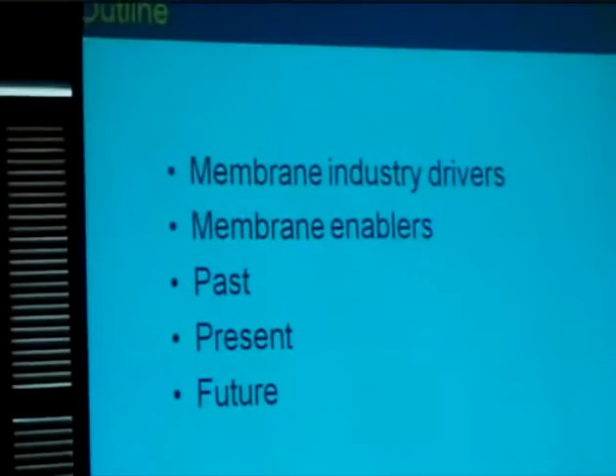Well, I'm going to briefly go over the drivers for this industry. Sven has actually talked a little bit about some of the things I'm going to talk about. Then I'm going to mention some of the enablers that have allowed membrane technology to play the role it has. Then talk about its past, present, and future, each of those areas very briefly.

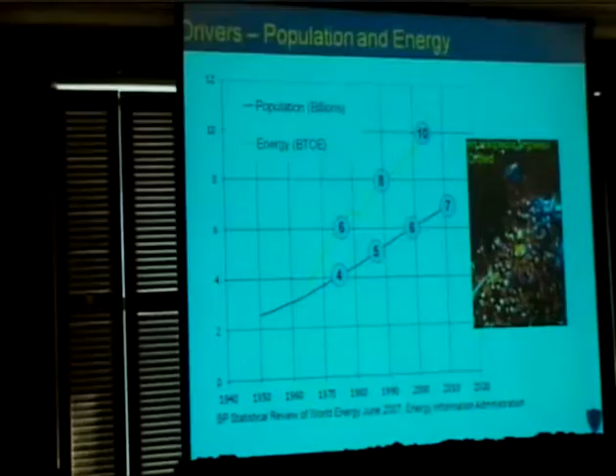The primary driver for interest in membrane technology is the growth in the world's population. If you look on this chart, you can see that by the year 2010 we're anticipating about 7 billion people on the surface of this Earth. Along with that comes a certain demand for energy, shown by this green line. We're using about 10 billion tons of oil equivalent per year, and if you extrapolate that line out to 2010, you can see we're going to have tremendous growth in energy consumption as well.

So what this says is that we can anticipate population and energy use are going to grow. Energy use is going to grow because we have more people, but also because the world's population is becoming more affluent. As they become more affluent, they tend to use more energy. There's a trend or correlation between growth in the gross domestic product and energy consumption.

I think that's an interesting question: can we decouple the growth of those two things? Can we have GDP grow without energy growth? It is possible, but if we just extrapolate the data we have, we see about 3% energy growth per year, which over a couple decades means we're going to increase energy consumption by 70%. I think that's not sustainable, and I think all of us would agree that's not sustainable given our current energy crisis.

But there is hope. At least in the US, there's been a study done by ORNL which identified 200 trillion BTUs per year of energy savings that are possible just by looking at separation processes used industrially and trying to modify those processes appropriately to reduce energy consumption.

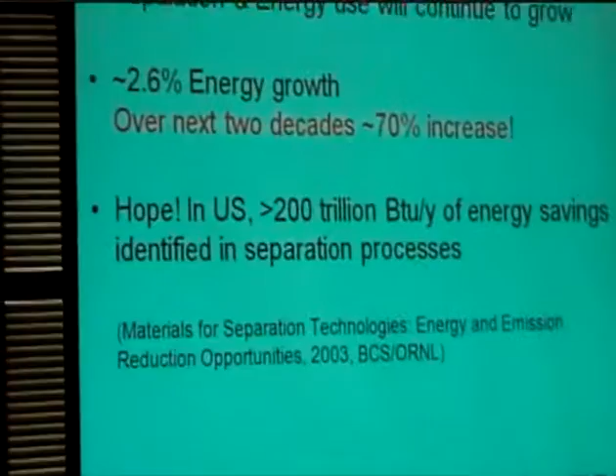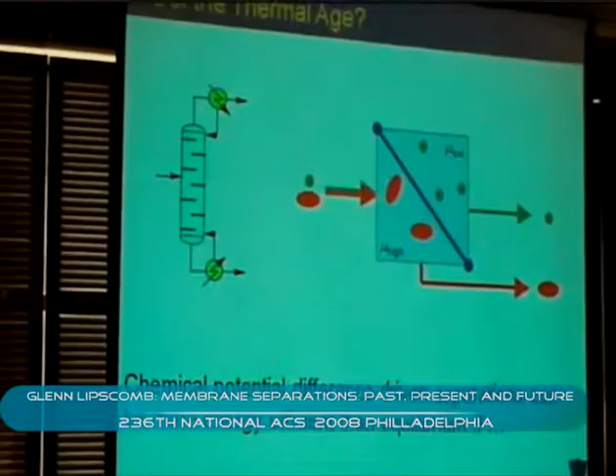Now how can we do this? Well, we might start thinking about the end of the thermal age. Most industrial separations are done using thermal or equilibrium processes, such as distillation. However, if we can switch to separation processes that make use of chemical potential differences, maintaining two streams inside a device at different chemical potentials, this can be a lot more energy efficient than an equilibrium separation process—this rate-based process.

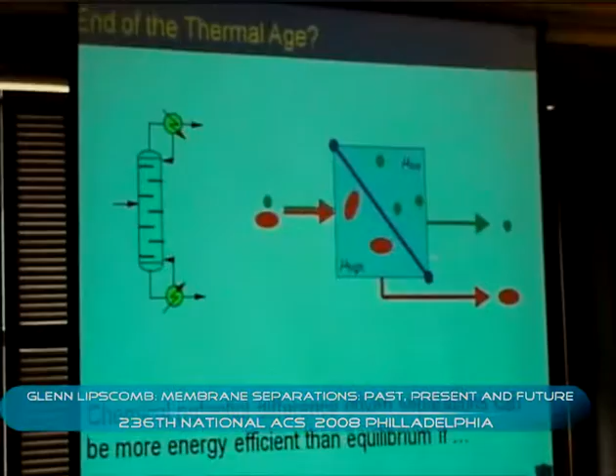Now, for this rate-based process to work, at least for a membrane process to work, we have to have a material that allows selective transport through it. We have this gradient in chemical potential across a material, say a membrane here. It's going to drive transport of the red and the green species across it, but all we want to allow is one of them to go across, say the green. So somehow we've got to come up with a material that will allow that selective transport.

And there are several ways of doing that. One, for instance, we can make a porous material, like this blue block here, that will allow different shaped objects to go through.

It will prevent this big blue circle from going through, but it will allow this red cylinder to go through if it's aligned in a proper configuration. So we can have size selective separations.

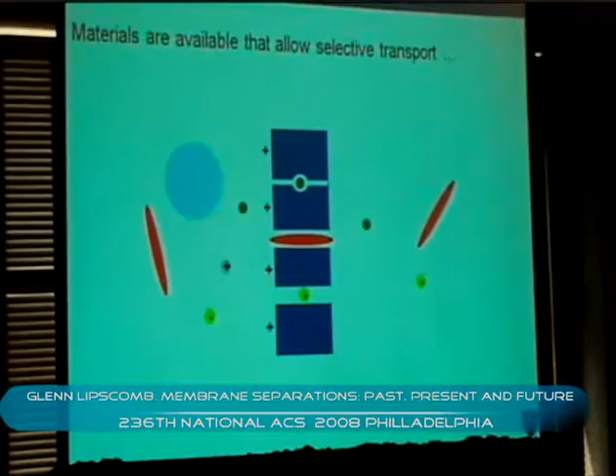We can also have separations based upon charge. If we charge the surface of this membrane in a positive way, then positively charged molecules will tend to be repelled by it, and negatively charged molecules will be able to pass through it more freely.

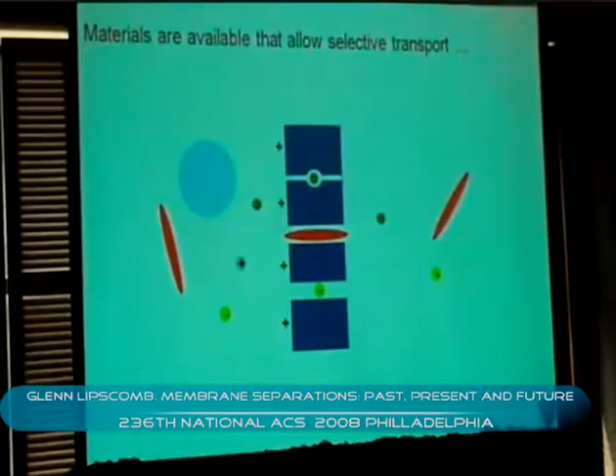We can also make use of differences in solubility. For instance, this little green circle right here, if it dissolves to a great extent inside this material and then diffuses through it, we can selectively remove it from something else that doesn't dissolve into that material or has a slower diffusion rate. So the key to membrane processes is identifying this material right here and making use of these different separation mechanisms. Now, there's been tremendous success.

So there's one story I think we need to tell as membranologists, everybody, to highlight the importance of this technology in the future. And I think that we're going to see this played over and over again in different areas.

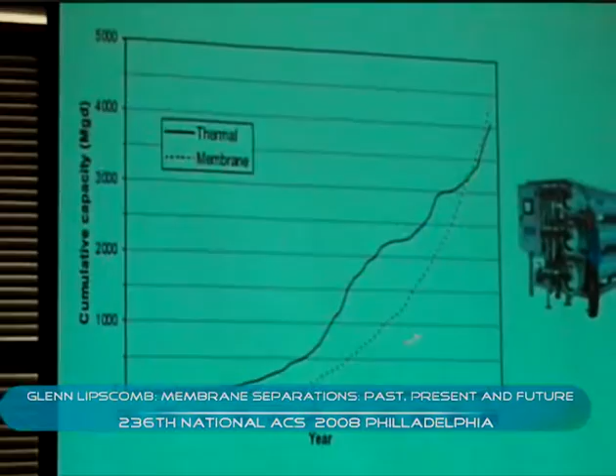Two interesting things to note: membrane processes don't exist until about 1970, it's all thermal until then. The second thing is that now membrane processes exceed thermal processes in capacity. And in fact, virtually every new desalination project is membrane-based. There aren't any new thermal projects.

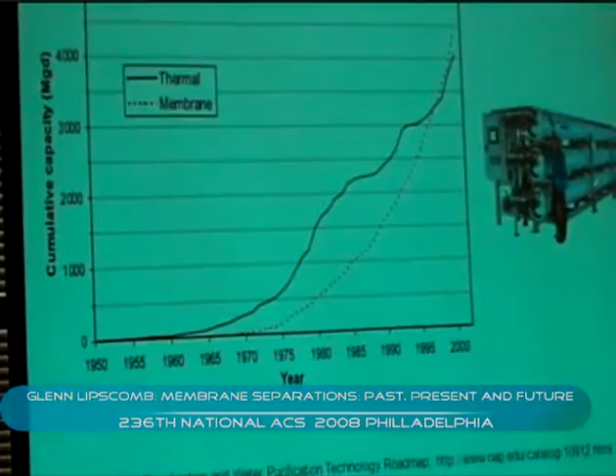What's shown over here is one of the largest desalination or membrane modules that you can buy. This comes from Koch. You can see the size of those things.

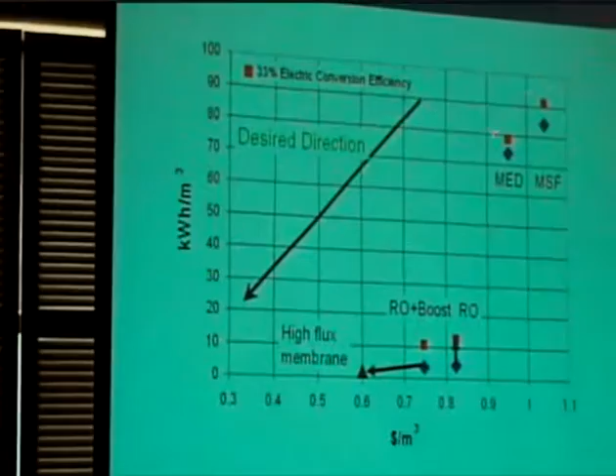Well, why have membrane processes displaced thermal? This is a plot of the energy required in kilowatt hours per cubic meter to produce a cubic meter of fresh water as a function of the cost of that cubic meter of fresh water for different processes. These four points up here in the corner are the values associated with thermal processes. The MED is multi-effect distillation, and the MSF is multi-stage flash.

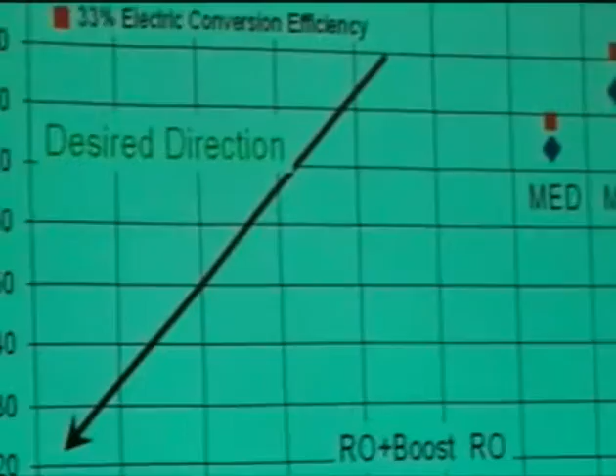The two different symbols, blue and red, correspond to whether we take into account the efficiency of converting a hydrocarbon into electricity. The red takes the efficiency into account. In fact, you're only 33% efficient in converting a hydrocarbon into electricity. Well, here's the values for the thermal processes.

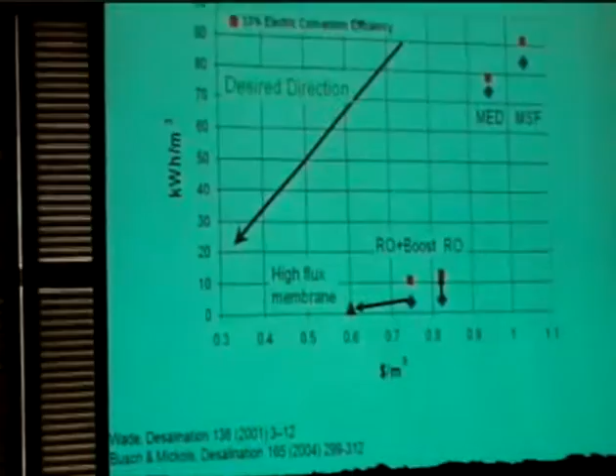What we really want to be is down here in this corner. We'd like to produce fresh water and have it use no energy and cost nothing. So we want to move from here down to here, and membrane processes allow us to do that.

Here's RO processes, I would say an industry standard a few years ago, an RO process in which we make use of energy recovery. You can see we have a tremendous drop in the energy consumption, a factor of 10 drop.

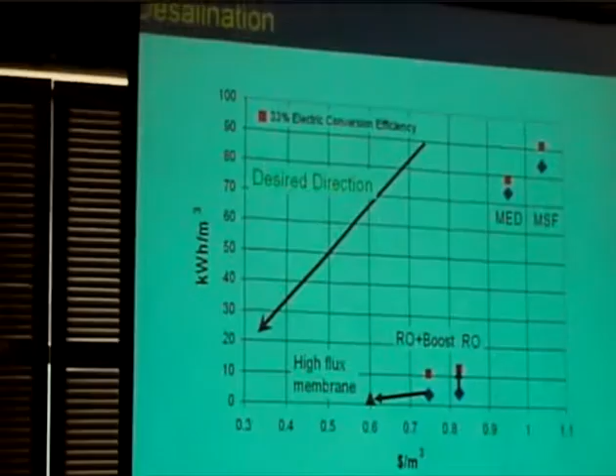That's huge. Secondly, we've reduced the cost by a factor of almost 2, especially if we take into account some of these new high-performance materials. Membranes have reduced the energy consumption by almost an order of magnitude and the cost by a factor of 2. I like that, and I think everybody should hear that, because this says that this is a technology we should be considering in a lot of other areas.

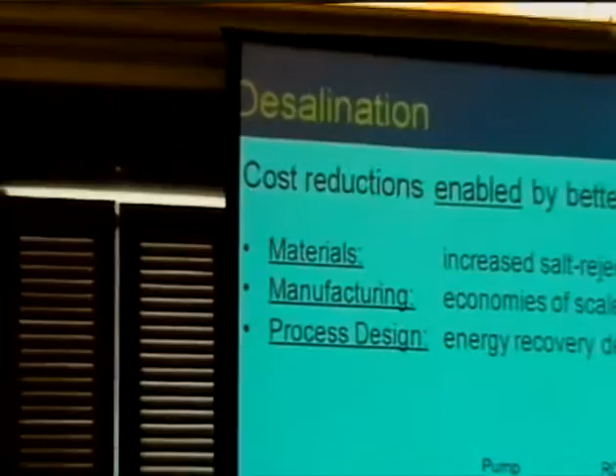Well, what has enabled that? First of all, we have to have material - a good material. There have been advances in making materials that have high salt rejection, more importantly, high flux and longevity. These materials have to last a certain period of time - 10 years, maybe more, 15 years.

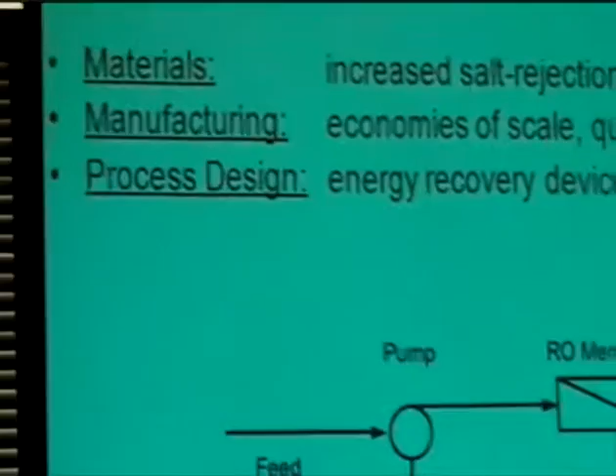There's also been changes in manufacturing, some economies of scale in the manufacturing of these units. And I think equally important, quality control. In fact, now we can make materials that are uniformly the same quality, with uniformly the same permeability and the same selectivity.

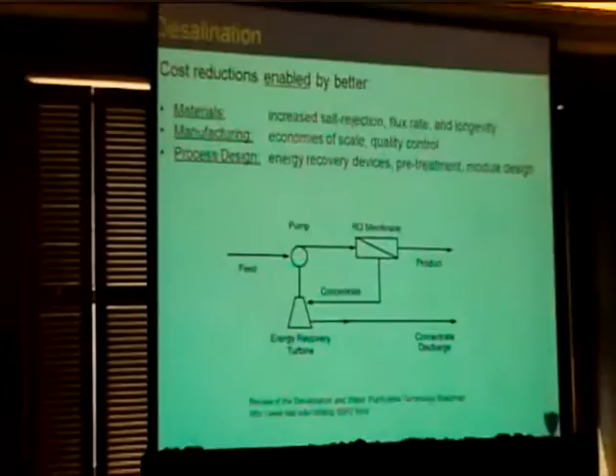And finally, there's been important advances in process design, energy recovery devices, and the fact that we need to pre-treat seawater before we run it through a desalination unit. If we don't pre-treat it, then that unit will only last too short a lifetime for it to be economically viable.

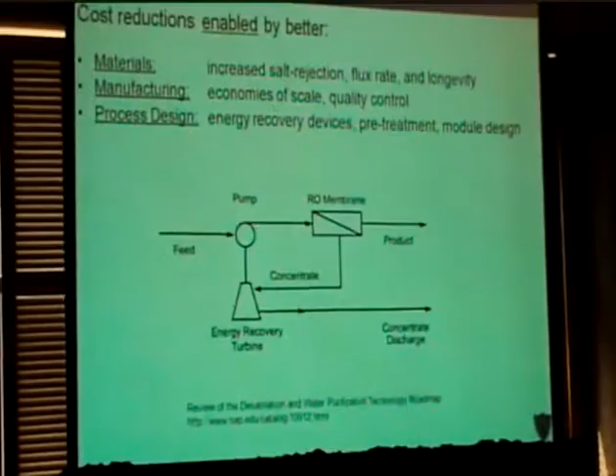Finally, module design: the fact that we're able to make large-scale devices that work efficiently. What's shown here is a picture illustrating this energy recovery turbine. We take seawater, pump it through an RO unit—what's missing here is all the pre-treatment equipment that should go right here. After it goes through this, fresh water permeates across the membrane and is collected as our product.

What's rejected is under pressure—it's a high-pressure concentrated salt brine. We can make use of that, recovering that energy by running it through this recovery turbine. All modern plants have that turbine to help or assist the pump in bringing the fresh seawater up to the appropriate pressure, 300, 400 psi or higher.

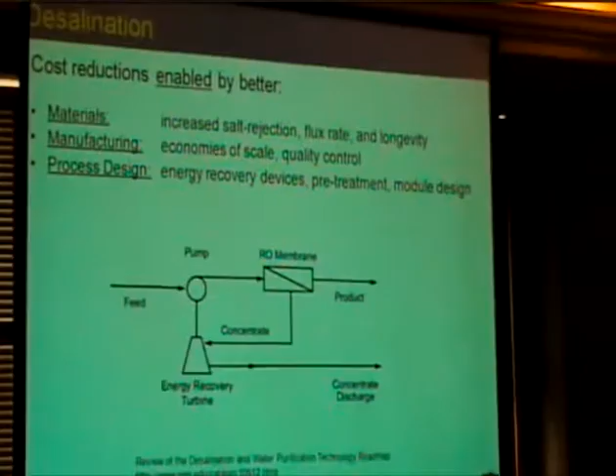Okay, that motivates why we're interested in membranes. Trying to provide some motivation for that, and what the key enablers are: materials, manufacturing, and process design.

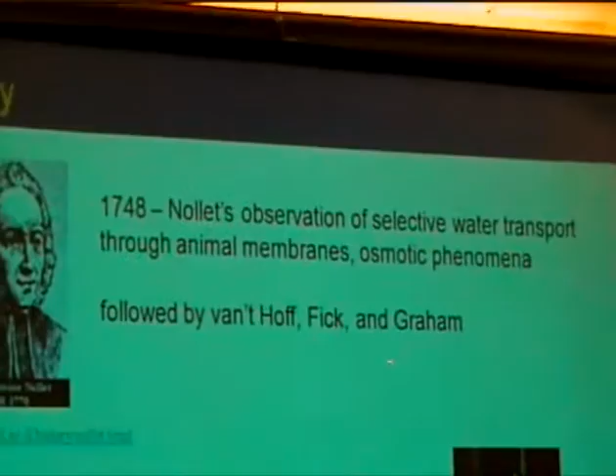Now I must go into what was in the article written for the special issue of the symposium, the ACS Symposium series, and talk a little about the history of membranes. Most people would trace the history of membranes to Nollet's observation that an animal membrane selectively allows water across it, but not alcohol. Van't Hoff figured out how to quantify that mathematically, and Fick and Graham followed up with studies of diffusion that allow us to characterize diffusion through these materials.

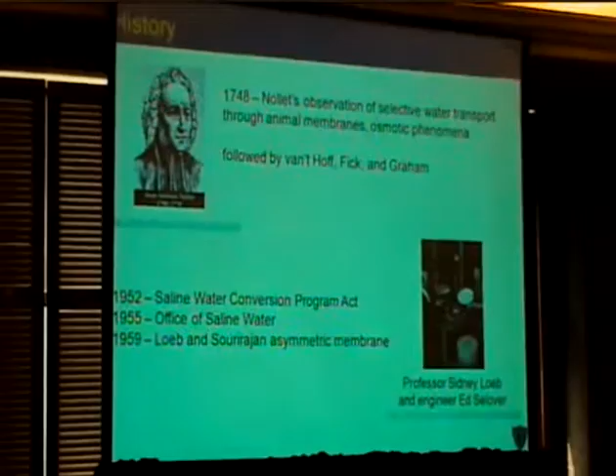But those were scientific discoveries, not made use of commercially until much later. I'd argue the commercialization of membrane technology started with the Saline Water Conversion Program Act in the US back in '52. Initially they weren't interested in membranes—they just wanted to produce drinking water for people in this country. They made some progress, and eventually that morphed into the Office of Saline Water, where there was increasing interest in membranes.

Ultimately, a few years later, it led to the key invention, the key discovery of the asymmetric membrane by Loeb and Sourirajan. They were nominated, I believe, for a Nobel Prize on this, and I think this is one of the key discoveries that have enabled membrane technology. Here's Sid Loeb, from a web page on UCLA's website, showing him and one of the engineers making some of the early RO membranes, Ed Selover.

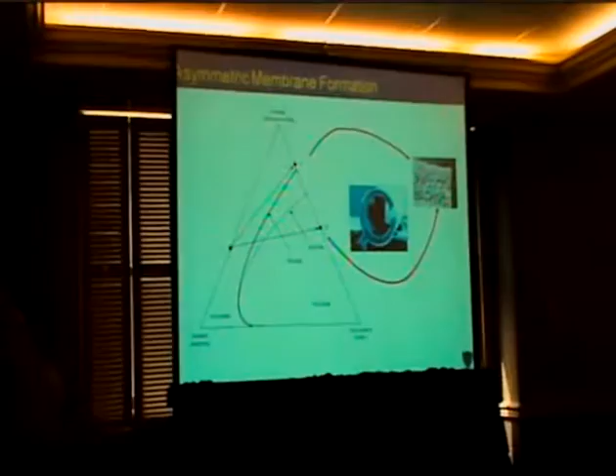What they found is that instead of just taking a piece of plastic—cellulose acetate, which is what they were using for desalination—and pushing water through it, they took that plastic and mixed it with a solvent, acetone, to make a solution denoted by point I. They selectively removed that solvent and replaced it with water, such that when they cast a film, the top ended up at composition point II, and the bottom ended up at composition point III.

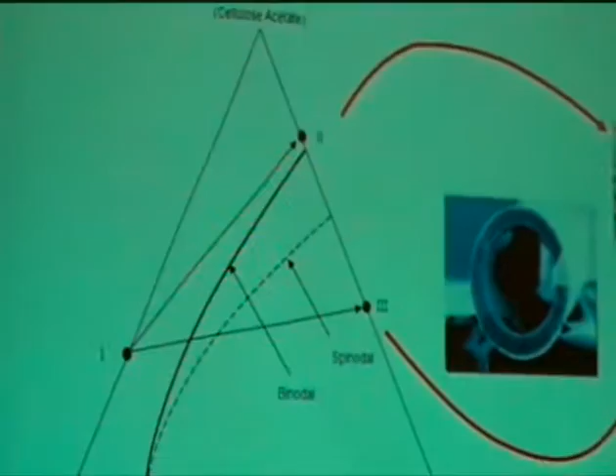We can envision this being a film or a hollow fiber—those are the two main forms membranes come in. Imagine we cast a film, selectively removing the solvent, acetone, and replacing it with water, such that at the top of the film we end up with this composition of cellulose acetate and water, and at the bottom we end up with a different composition. Now those two compositions differ in a very important way.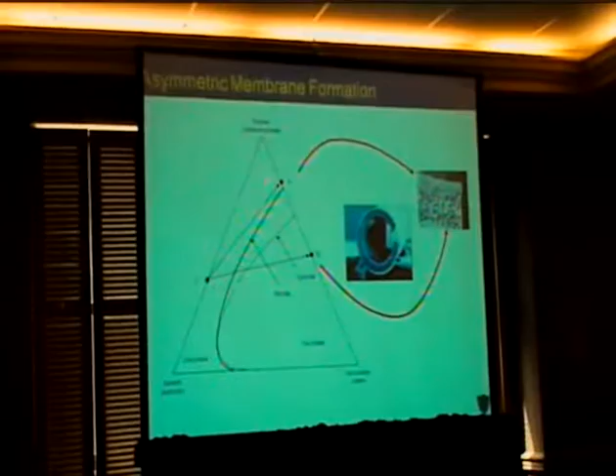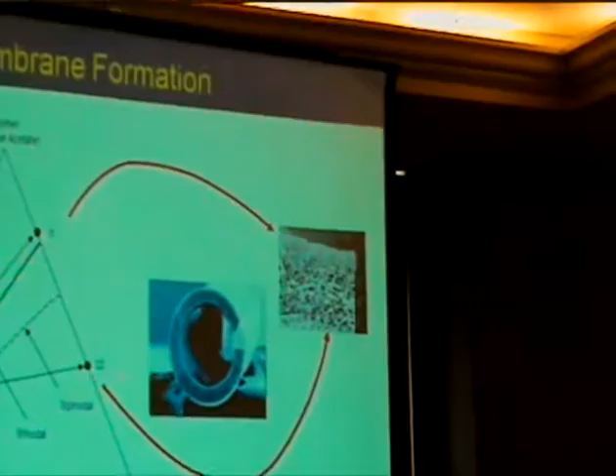One lies outside the phase envelope, outside the binodal, so we have a one-phase solution at 0.2; 0.3 is inside it, so that's two-phase. Now let's remove the water. If we remove it slowly enough from the one-phase mixture at 0.2, we produce a dense polymer film, as shown at the top of this SEM image. If we remove the water from the phase-separated mixture—imagine droplets of water inside a polymer-rich region—removing those droplets leaves behind this porous structure underneath, corresponding to 0.3.

What we've done then is create a film or fiber wall that has a certain macroscopic thickness, but the effective dense thickness, where the discrimination occurs between salt and water, can be much thinner, confined to a sub-micron region, whereas the support structure underneath can be several microns thick. If you design the pore structure correctly, it poses very low resistance to permeation and no selectivity. This is the key innovation right here.

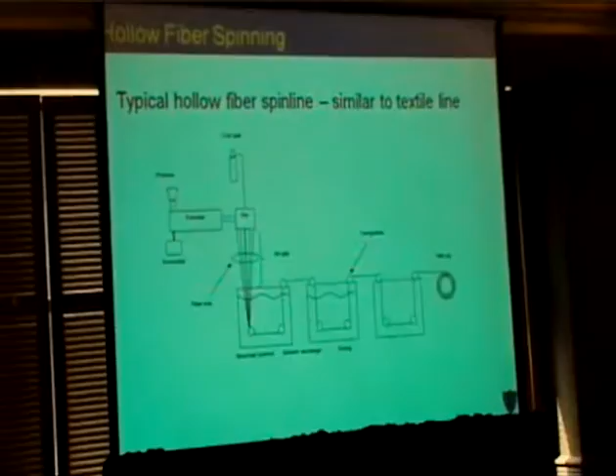Now they make use of this innovation, starting with hollow fibers primarily for desalination and also films. They take the polymer and solvent, mix it in an extruder, and run it through a die to form a group of hollow filaments, a fiber tow, just like you would in a textile line making solid textile fibers.

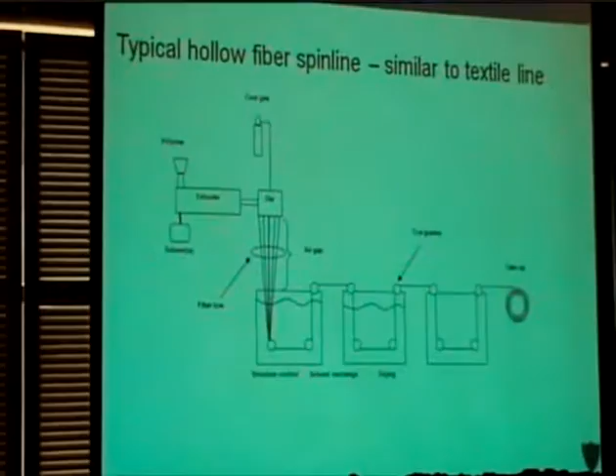This tow then would pass through a couple of baths. The first bath might set the structure, causing the solvent exchange that leads to an asymmetric structure of a thin dense film on top of a very porous support. Subsequent baths set that structure and dry it, and finally the fiber is taken up on a spool, just like you would take thread up on a spool for sewing.

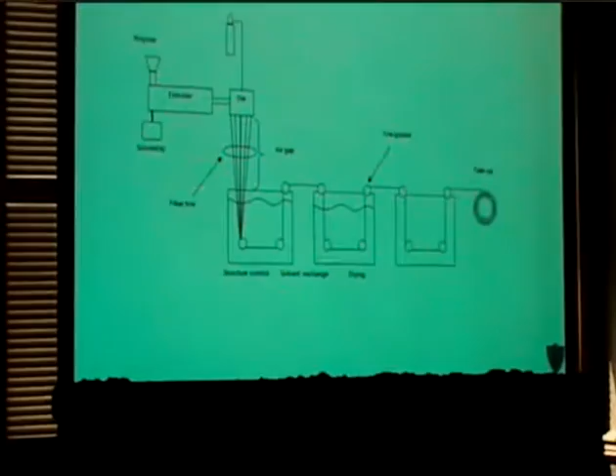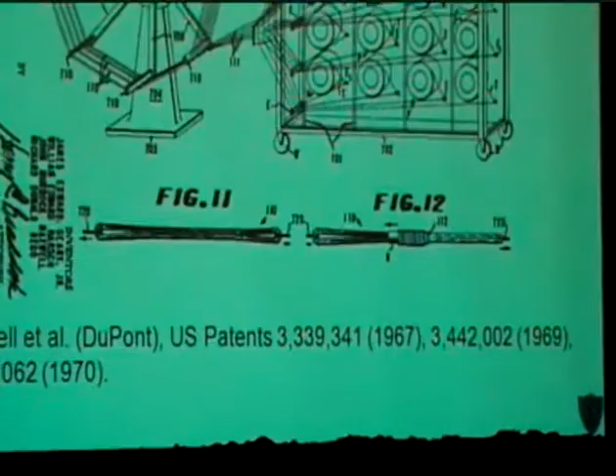So this is how the fibers could be made. I'm going to show you how you make modules out of that, because although a lot of work has been done identifying the right materials for different separations and ways to make those materials into films and sheets, I think one of the key enablers is how you make the modules out of that. I'm going to talk about some patents which I think should be required reading for anybody interested in membranes.

This work was directed toward gas separation. Although it was directed toward gas separation, a lot of these design and processing steps were motivated by work they did for desalination initially under the Office of Saline Water. So I highly recommend you read these patents.

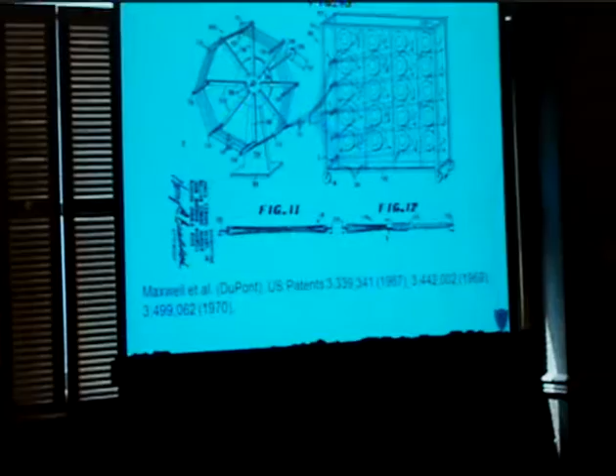Once you take this fiber up on a spool, what they describe is how you make it into useful devices. You take these spools, put them in an array, pull the fiber off those spools, and wrap them around this device. You can see there are multiple filaments—4 filaments being wrapped continuously around there.

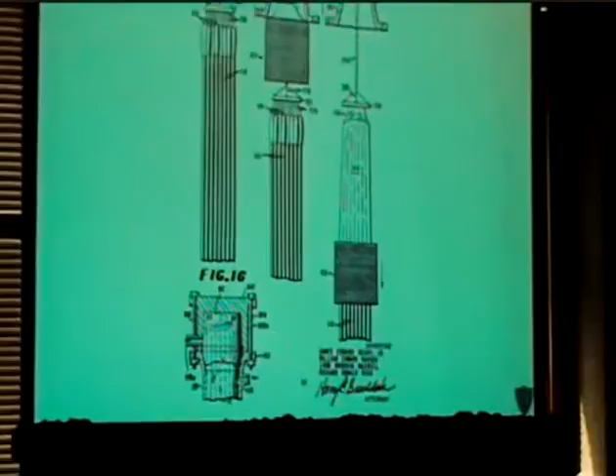What Maxwell and his coworkers at DuPont taught us is that you take one of these spools of continuous filaments that's been wrapped, stretch it out, and pull a sock over it. This little thing is an elastic sock. The reason you put that sock over there is to hold the fibers in a roughly uniform configuration relative to each other. A bunch of these sock-wrapped tows then get hung together from a plate like this.

This now forms our macroscopic module. To hold these individually wrapped fiber tows together, another sock gets wrapped around it. Once again, the purpose is to hold them so they're uniformly spaced relative to each other—you don't end up with big gaps between them.

Once you form this sock-wrapped module, a case gets put over the end of it—here's the sock-wrapped portion, and here's the case that goes over the top. What they suggest you do then is take this module and put it into this device right here.

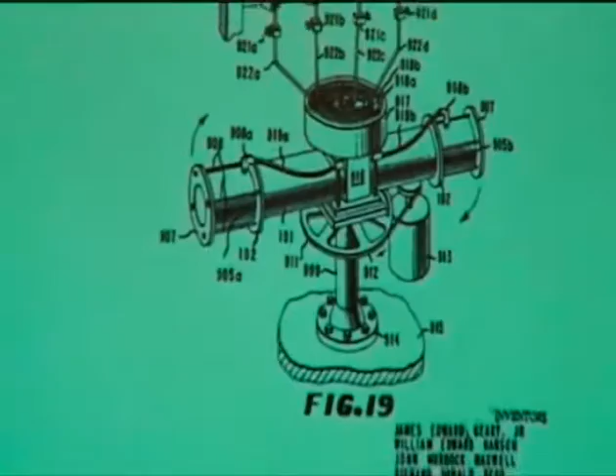What this device does is rotate. As it's rotating, an epoxy is fed from these pumps and reservoirs up here into this cap, which is a mold. The epoxy flows into that mold and hardens. As it does, the centrifugal forces keep the epoxy from wicking up into the fiber bundle, forming a nice edge to the tube sheet being formed.

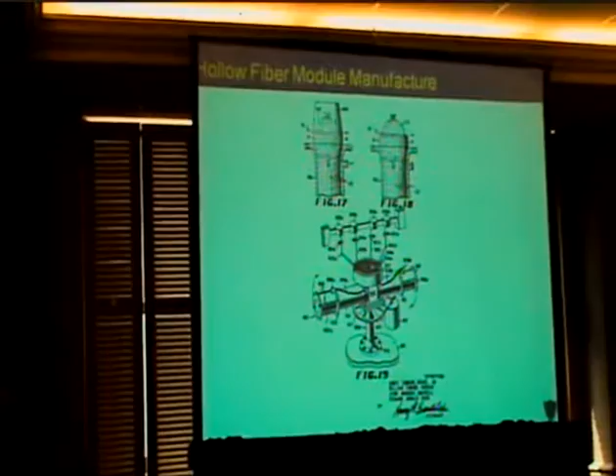Once you epoxy encapsulate the end of this bundle, you can cut it, which allows you to open up the fiber lumens and get access to them. The rotation prevents the epoxy from wicking up into the fiber bundle.

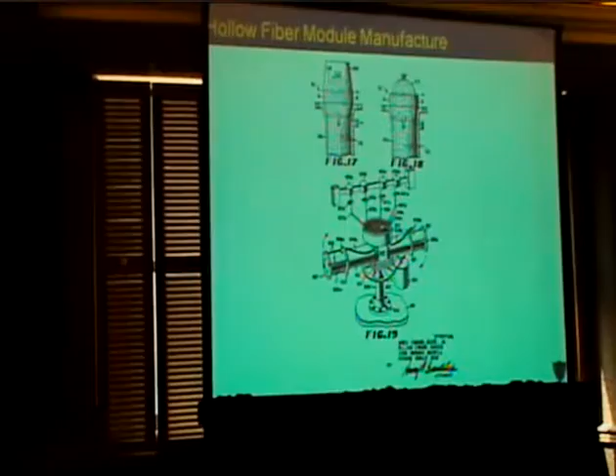Once you take that module and put it into a case, you end up with something that looks like this. This is a typical hollow fiber module, and it looks like a shell and tube heat exchanger—it's the mass transfer equivalent of that.

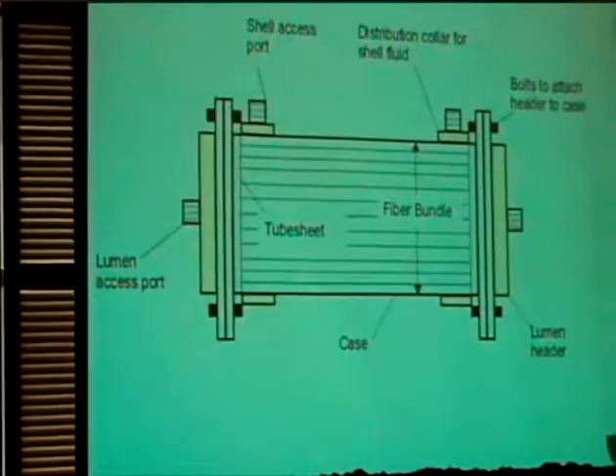If you look at this, there's a port on the outside to introduce a fluid such that when it encounters this tube sheet, formed by the centrifugal potting process, it's forced to flow through the lumens of the fibers, coming out an opposing tube sheet and then through that port right there.

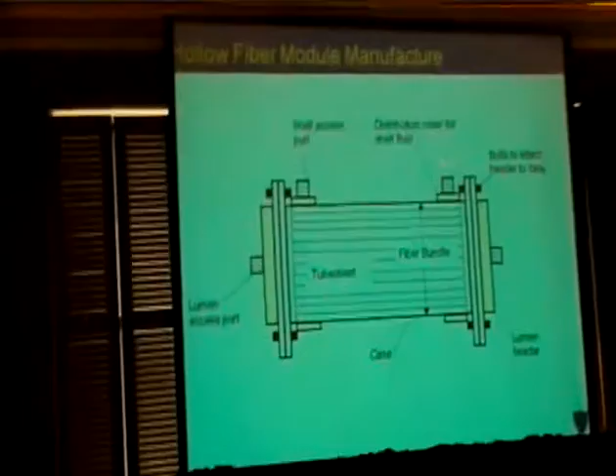Anything that permeates across the fiber into the space outside the fiber, into the shell, can be removed from ports attached on the outside of the case. If you have two ports, you can introduce a sweep fluid through this shell space as well.

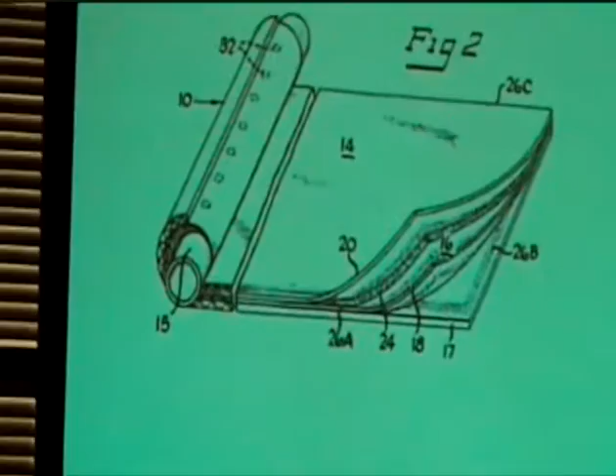You glue those two membranes together to form a sheet, or a little leaf. In operation, you pass seawater across the top of this. As it passes from the bottom of the image to the top, under pressure, fresh water will permeate across the membrane into the space between the two formed by that spacer.

The glue lines that exist all the way around the sheet force the permeating water to flow toward this collection tube here. The sandwich is glued to these ports, which are in communication with holes on the collection tube, allowing you to withdraw the fresh water.

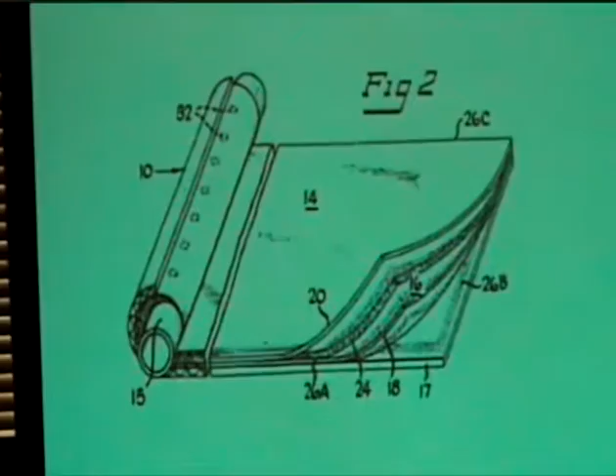A key design element allows you to put multiple sheets into one circular package, one module—that's what's shown here in the patent by Bray. I'm not going to go into the details of how you do this. The reason you want multiple leaves is that there's a pressure drop associated with flow through the leaf, and if you make it too long, the pressure drop kills you. So you put in multiple leaves with a spiral wound design.

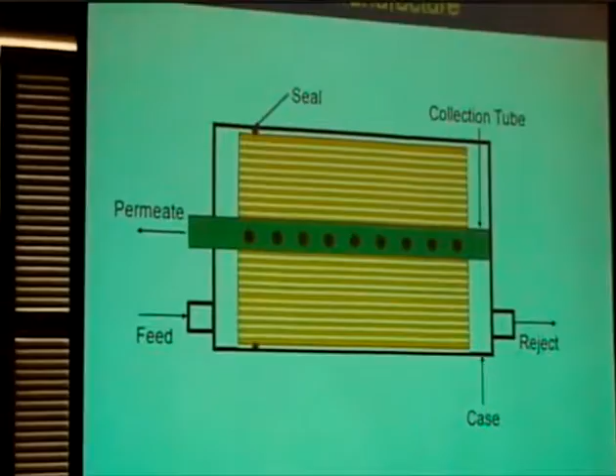You put this whole thing into a case, the spiral wound module. It has ports that allow you to introduce a feed and pull out a reject, which is what doesn't permeate as it flows through the module. What permeates across the membrane, into the space formed in that leaf by the permeate collection spacer, comes out through this tube right here.

Okay, that's membranes past. Now I want to talk about membranes present. This slide shows the current membrane market—roughly $3 billion per year, according to a study done by the Fredonia Group, broken into these categories right here.

Microfiltration makes up roughly 45%, then reverse osmosis, ultrafiltration, and other applications down here at 13%. This includes primarily gas separation—nitrogen production, followed by hydrogen purification and CO2 separations.

So it's a huge market, expected to grow at almost double-digit rates through 2012. Now, what's not shown here is dialysis membranes. Dialysis membranes are really the largest market, but these figures are just membranes in industrial markets, not medical markets.

This is the Loeb-Sourirajan membrane here, showing the porous support underneath, and on top the perm-selective layer.

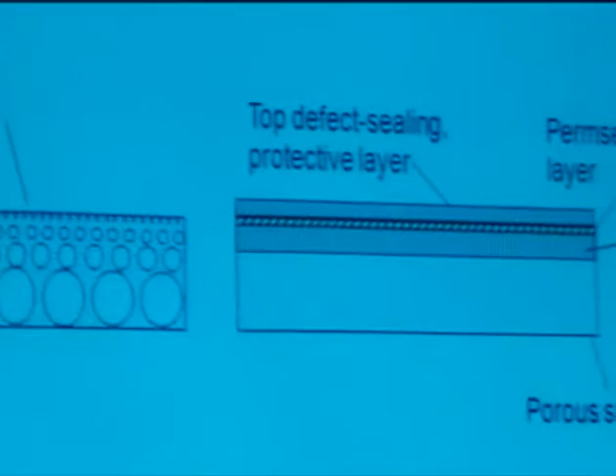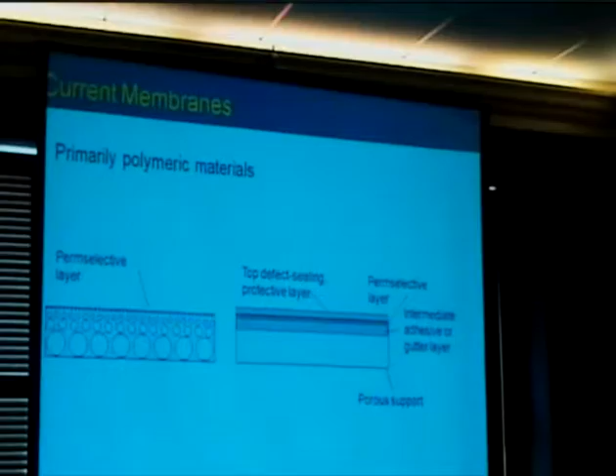Currently, a number of membranes do not consist of this asymmetric structure, but consist of a composite membrane structure in which you form a porous support separately, or perhaps at the same time, on top of which you put an adhesive or gutter layer, on top of which you put the perm-selective layer. This is not an asymmetric structure, but a composite structure of these three different elements. This separate porous support can be made of a different material than the actual perm-selective layer on top.

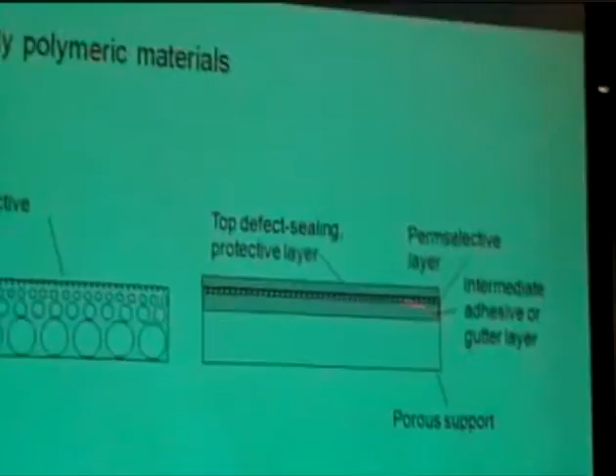This adhesive and gutter layer between the support and the perm-selective layer, as well as a top protective layer, help seal out defects as well as provide mechanical strength and protection to the sandwich. So these composite membranes are becoming more common relative to asymmetric membranes.

Current manufacture does not look like it did back then. Film hollow fibers are still spun using a similar process, but instead of being wound or formed into a module like I showed you before, they can be woven, and this is becoming increasingly frequent, into a fabric as through this loom right here.

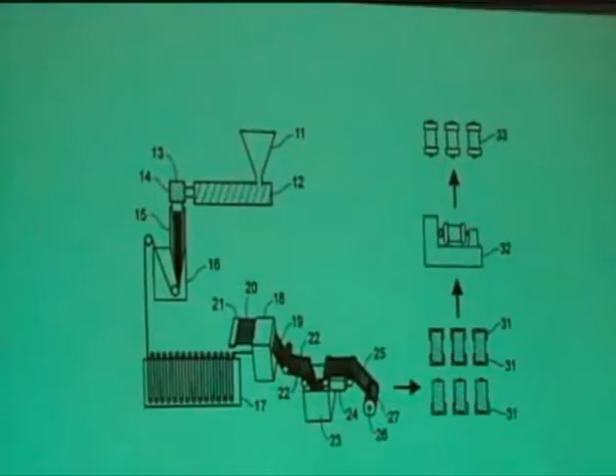This fabric then gets wrapped around a spool to form a module. Instead of centrifugally potting these modules, what you can simply do is just dunk them into a bucket, fill the bucket with epoxy, and you can form a tube sheet that way. This is a much simpler process and a much more common one nowadays.

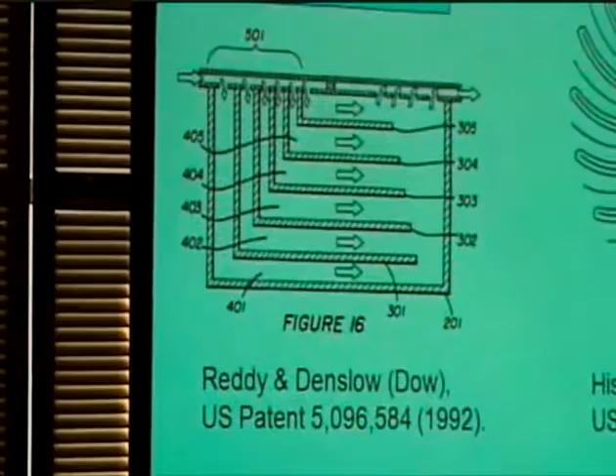In terms of spiral wound manufacture, instead of having just a single sheet, a single leaf in which you force the permeate to flow in a cross flow direction relative to the feed, this black arrow, you can actually put glue lines inside the leaf to give a countercurrent flow inside the leaf, as well as allow the introduction of a sweep into that leaf. Also there's lots of effort going into how you produce modules that have many, many leaves in them.

So we talked about drivers and enablers for membrane technology. We talked about the past very quickly, very briefly. We talked about where I think the current state of the art is. Now I'm going to talk about the future. This is going to be primarily on markets.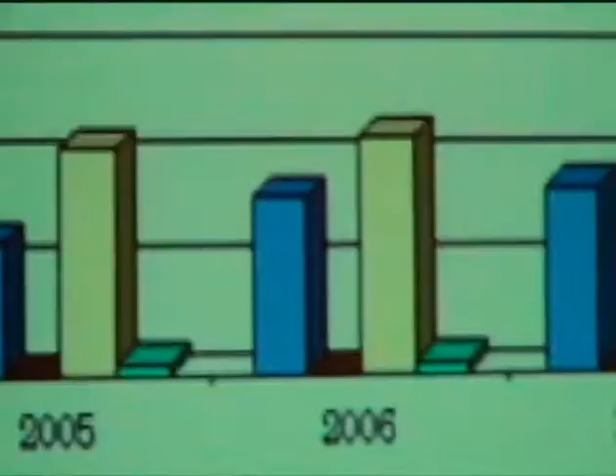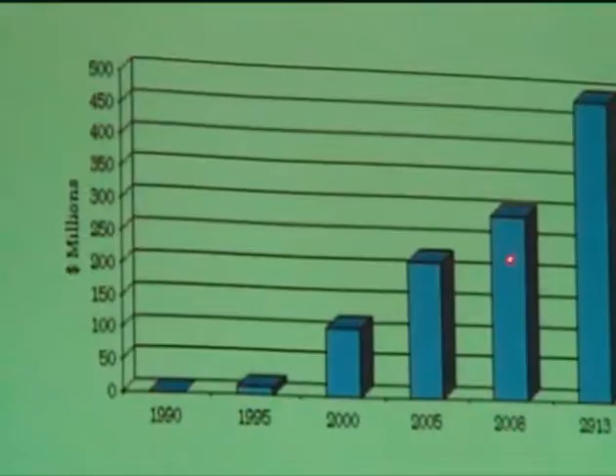What you can do is pull clarified water through the fibers here, and you can produce a higher quality permeate and increase the capacity of the treatment process dramatically by using this membrane technology. That's why you're seeing growth from where we are right now in 2008 of about $300 million to $500 million by 2013, about a 10% compounded annual growth rate.

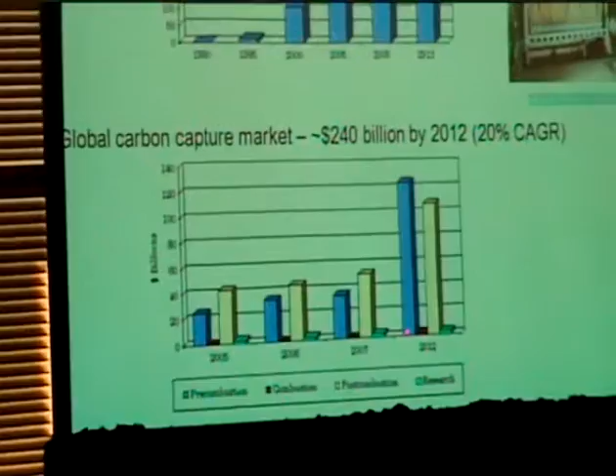Another area that I think we'll see increasing interest and demand in is carbon capture. Once again, BCC Research predicts that if we look at both pre-combustion and post-combustion carbon capture technologies, they're going to grow from levels on the order of 50 billion a year now to levels over 100 billion by 2012. Where can membrane technology have an impact here? There's two areas where they can, I think, have a dramatic impact.

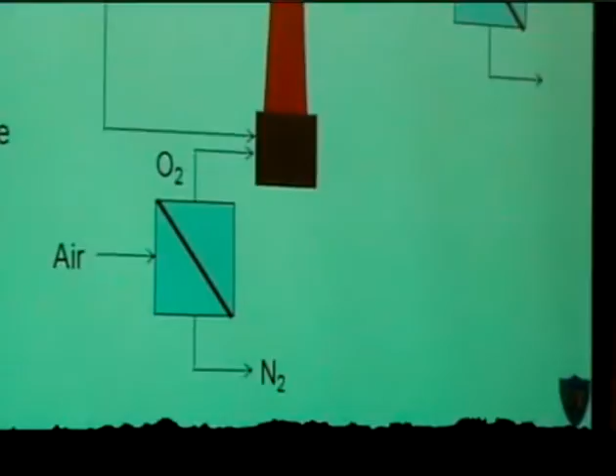One being pre-combustion, one being post-combustion. Let's first talk about the pre-combustion area. What you can do is make use of a membrane process, which John did mention a little bit, not with membranes, but with cryogenic distillation. You can take air, produce oxygen, and use that to burn whatever it is you're burning. And the flue gas that you produce is predominantly CO2 and readily sequestered.

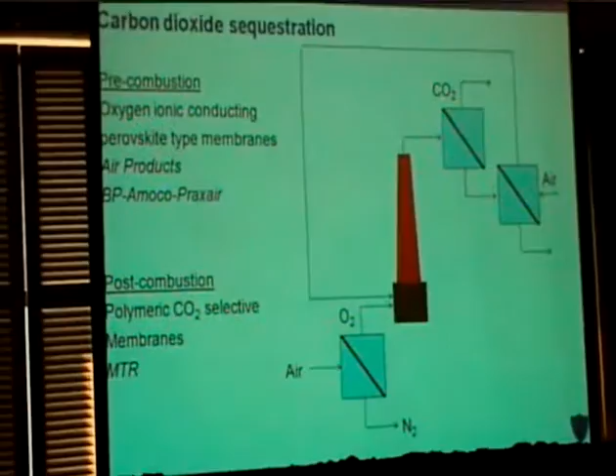Instead of using a cryogenic technology, we can use membrane technology. One of the very interesting materials for doing this is these oxygen-conducting perovskite membranes. What they do is they're 100% selective to oxygen. So if you have a material like this, it will produce a pure oxygen stream which you can feed to a burner like that. There's two groups looking at commercializing these things, one headed by Air Products, another including John's company Praxair, BP, and Amoco.

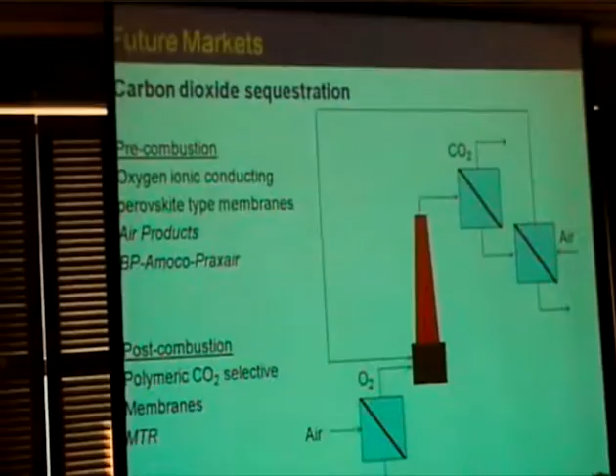These companies are putting significant investments in this technology. I think membrane technology has an opportunity here as well, another area where our polymeric membrane technology has potential in post-combustion, where you can use a polymeric material to selectively remove CO2 from the flue gas.

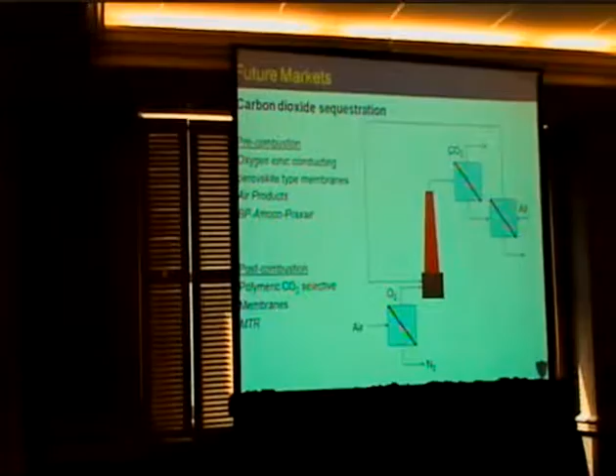A very innovative process proposed by MTR is to use the air that you feed to this as a sweep on a stripping stage, as a second sweeping stage. This could allow you to dramatically increase the recovery of the CO2 while simultaneously increasing the content of that product stream that you produce.

Another area is in bioethanol. If you take the fermented mash, currently it goes through a beer column which takes it overhead and then to a rectifier and a stripper. What you can do is replace the stripper and the rectifier and the subsequent molecular sieves with two membrane units.

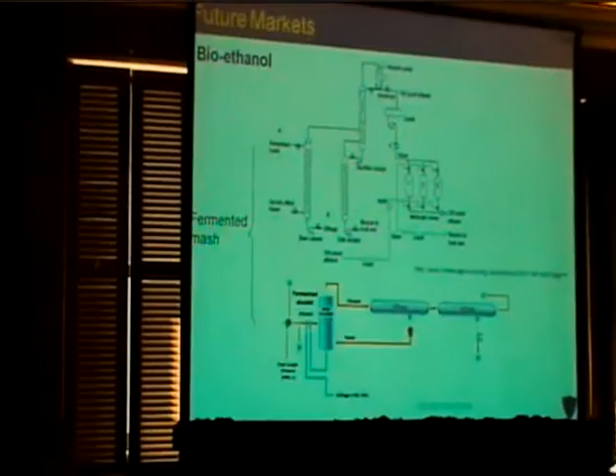This is remarkably similar to where we were in desalination about 30, 40 years ago. Here we can replace two distillation columns with membrane technology. I think we can see comparable energy savings as well as cost reductions in the bioethanol market.

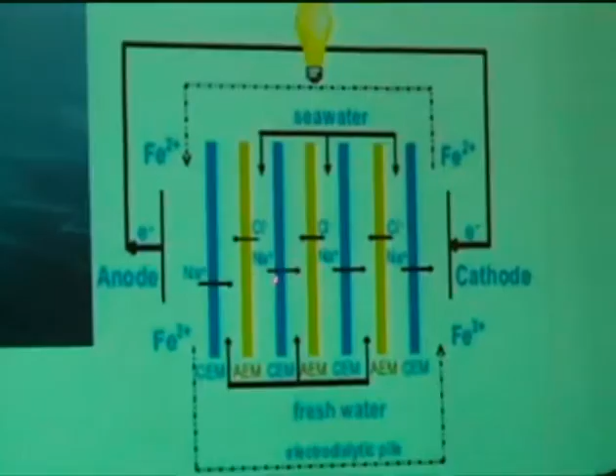One area that's a little further out is how we can produce energy from where fresh water mixes with ocean water. This diagram shows river water flowing into the ocean. We can run this through a reverse electrodialysis unit where we have alternating cation and anion exchange membranes, as the fresh water flows through and we exchange the ions from the seawater with the fresh water.

As the ions move, they carry a current with them, and we're able to produce electricity from that. So you can imagine putting these reverse electrodialysis plants wherever we have rivers or large streams going into the ocean and producing electricity for free, except for the capital cost of the plant.

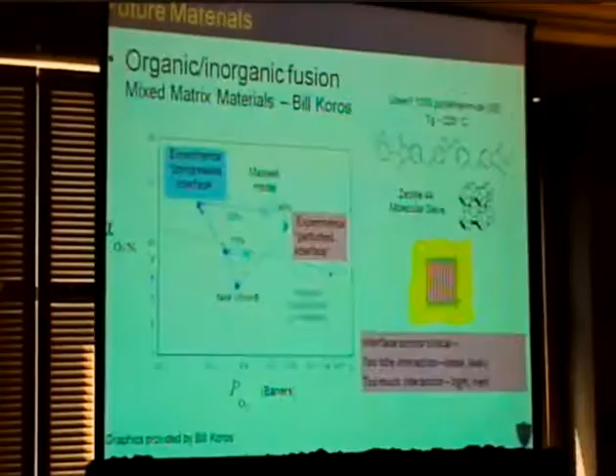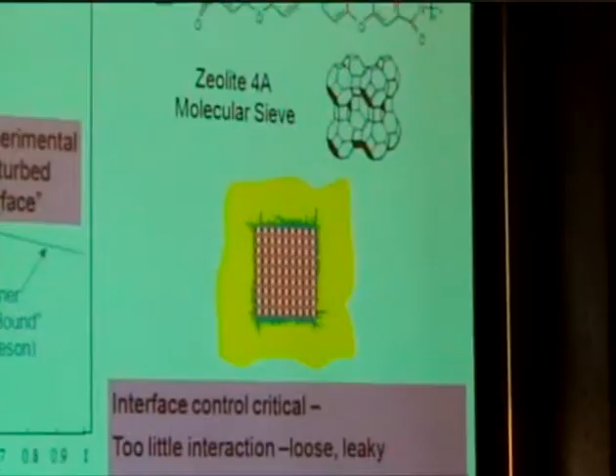I have two other slides I want to mention, about where the future materials are. I think the future materials are going to come from composite materials, ones in which we blend the properties of polymeric materials with inorganic or solid materials. These mixed matrix materials have the ability to let us increase the permeability of a material while simultaneously increasing the selectivity.

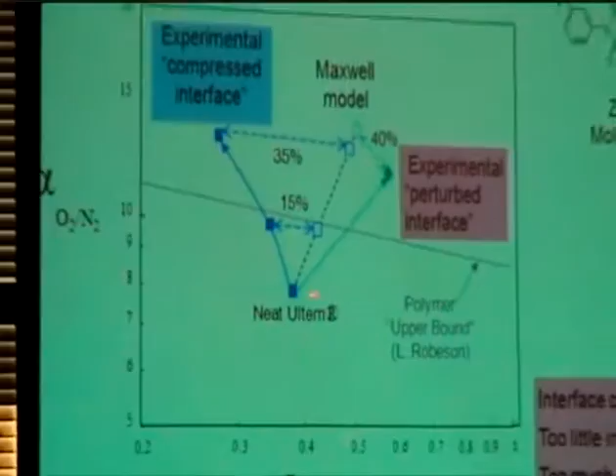Shown here are the results of mixing zeolite 4A in with a polymer, this polyetherimide, Ultem 1000. You can take the polymer, and by mixing in the zeolite, change its permeability, increasing it, as well as increase its selectivity, moving in this direction from the pure polymer up to regions where we have significantly higher selectivity as well as higher permeability.

By properly controlling how you put the zeolite into it, and perhaps adjusting the interface region between the zeolite and the polymer to improve adhesion, you avoid gas bypassing around that interface or gas being precluded from entering the zeolite. I won't go into the details here.

Finally, I just want to talk about carbon nanotubes. Carbon nanotube membranes, where you disperse carbon nanotubes, either multi-walled or single-walled, into a polymeric matrix, have very exciting properties. You can increase the gas diffusion coefficient by a factor of 10 due to specular reflection.

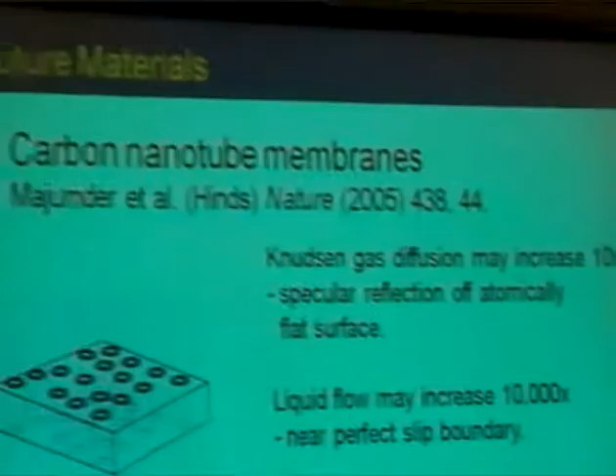You can potentially increase liquid flow rates through membranes by a factor of 10,000. These are huge increases due to the nanostructure of the pores that exist here and the fact that they are nice and straight. I think this is an area where we'll see significant research activity over the next few years, the next decade. Eventually, you can even put gatekeepers on the mouth of the pore.

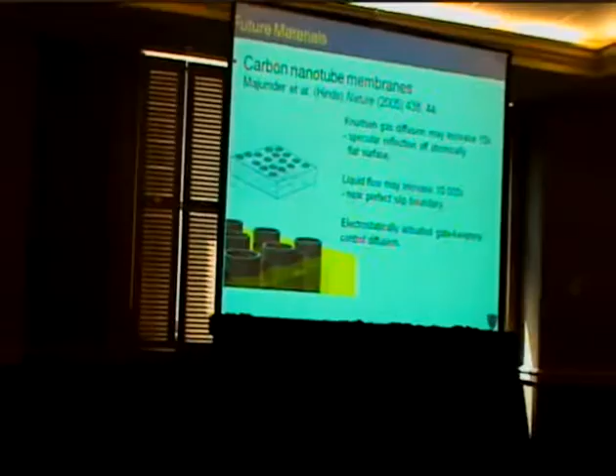With that, I'll conclude. I want to emphasize that this industry we're talking about, this $3 billion industry, has just emerged over the past 50 years or less. Government support was critical to making this happen. The Office of Saline Water was such an important factor that we need to encourage, we need to tell the government: this is what happened once before, you need to consider doing this again, because look at what you can do.

Energy concerns are going to drive significant growth of the membrane market. Finally, I think we're going to see its impact in many industrial sectors because of its ability to reduce energy consumption. I'd like to thank Bill Koros for providing some of the graphics you saw. Keith Murphy was part of a brainstorming group on how membranes can reduce energy consumption, and Neil Chung gave me some time to work on this while I visited him. With that, thank you for your attention.